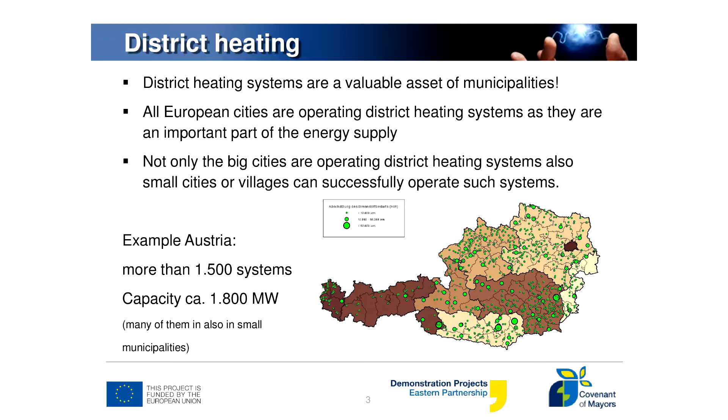I'd like to start with a general approach. I think district heating systems are a very valuable asset of municipalities. But my experience is that municipalities do not really consider this a value, it's more a headache, and usually they want to get rid of it.

They want to either support the disconnection of consumers, because there's less willingness to pay, or there are social issues as well. So it's not seen as an asset or a business case. But all European cities operate district heating systems and see them as a business case, not just a service—they want to earn money. I would propose that you see this district heating system as a business case and try to expand and improve the system, not close it down and disconnect consumers.

Big cities aren't the only ones with district heating systems - small cities and villages can operate them successfully too. Austria is a good example, with a long history in small district heating systems, starting in the 80s with biomass-based systems, because Austria is very rich in forests.

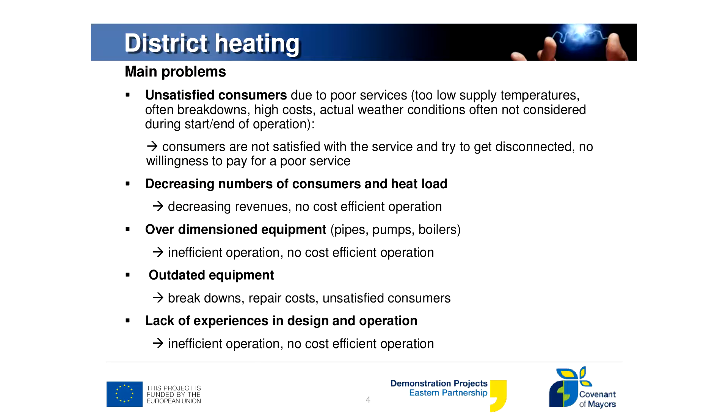What are the main problems usually? Customers are not satisfied because the service is poor - usually low temperatures, high costs, breakdowns, and the start and end of operation is just by the calendar and not the real weather conditions. This creates dissatisfaction for the consumers, and they try to disconnect and build their own individual system.

And this leads to the next problem: we have a decreasing number of consumers and a decreasing heat load, meaning lower revenues for the district heating company, and the operation of the system is not cost effective anymore. This further leads to overdimensioned equipment, huge pipes, pumps and boilers, inefficient operation, and poor cost efficiency. We have outdated equipment.

This leads to breakdowns, high repair costs and unsatisfied consumers. Also a problem is lack of experience in the design and operation of a good modern plant.

So what are the steps in a refurbishment project? I think everybody knows this, but let's go quickly through it. First, you should initiate an energy audit, then do the energy audit, select the refurbishment measures, do the technical design, the authority approval and procurement, implementation, and then monitoring.

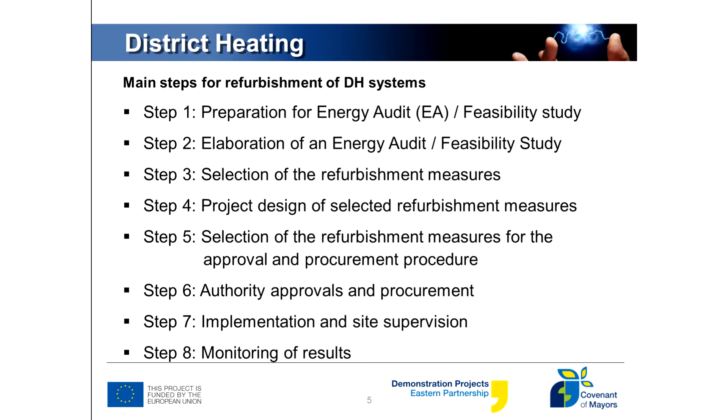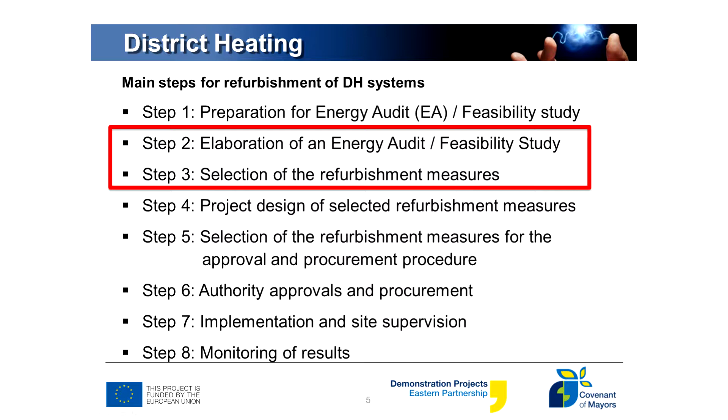I'd like to point out the most important steps in this process - in my experience, the most important steps are during the energy audit and the selection of refurbishment measures. At this very early stage, you actually determine the main components of the project: the boiler size, the type of fuel, the location of a maybe new plant, and this determines all other steps which follow. That's why I think it's very important to think carefully during these steps, how to pre-design and develop this project.

I'd like to pick out some main issues where I think it's important during the development of such a project. You should analyze your consumer situation.

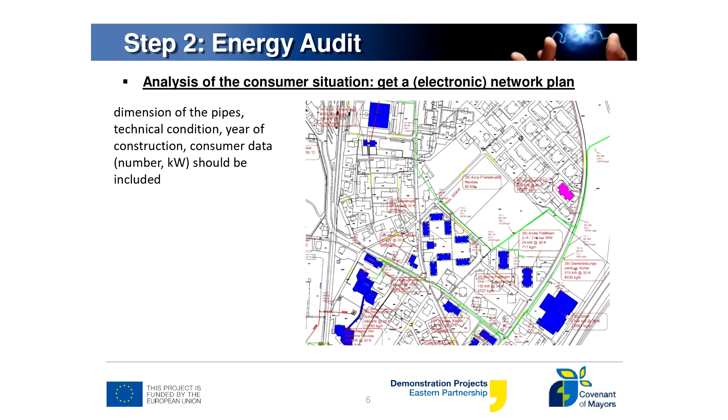You should have available a network plan with information about your consumers - the name or number of the consumers, the heat load, the pipe system, the dimension of the pipe system. Usually, if I come to a district heating system, they are not able to provide a list of consumers or a network plan within 2 hours or even half a day, because nobody knows their system. This is really a bad example, because if you don't know your own system, how can you improve or operate it successfully? So I really recommend good documentation of the existing system.

This, for example, is a table of a consumer list. You have the names of the consumer, the number of the consumer, and a link to the network plan - for example, if there's a heat substation installed or not, the capacity, heat meter, and for the last year, the consumer consumption data.

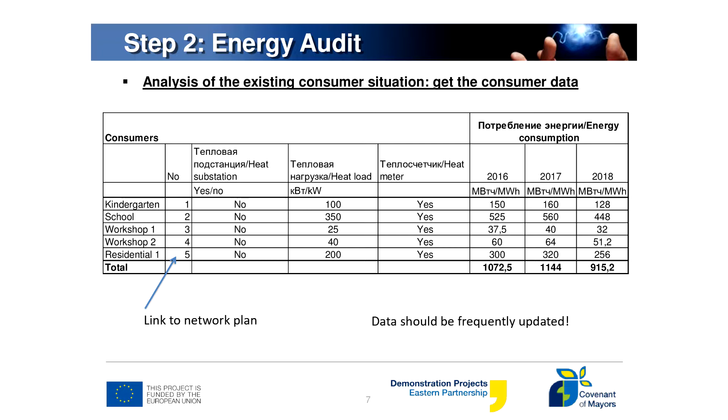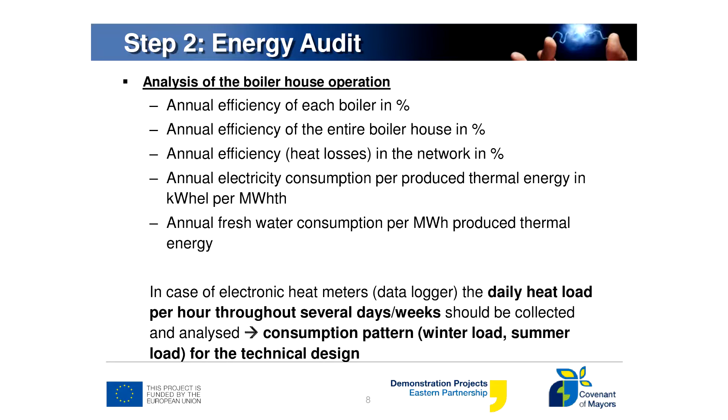What else should you look at? You should analyze the boiler house operation - calculate the efficiency of each boiler, the efficiency of the whole boiler house, the network, the electricity consumption, and the freshwater consumption. It's also important - data in general are important for the technical design, because without data you just guess, and this is not enough for an efficient system.

That's why you also need electronic heat meters with a data logger, and you should look into this data and find out the heat pattern - the consumption for each hour. You should read this data and analyze it, and this will give you the consumption pattern for the winter and also for the summer. This is important for the technical design.

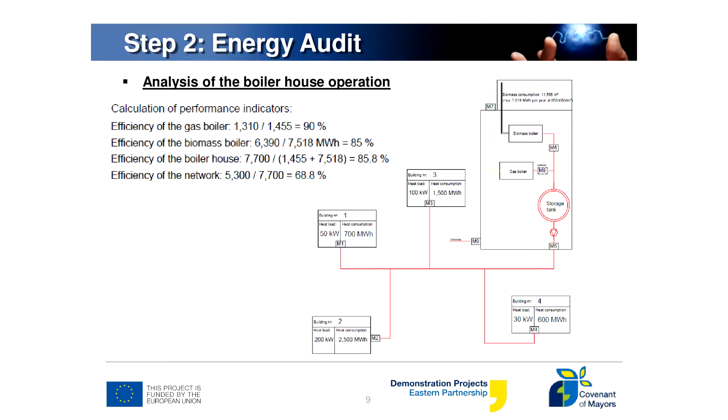This is an example of an example system. You have here the boiler house, a biomass boiler, and a gas boiler. You have 4 heat consumers, and here calculations of this operation data. The gas boiler has an efficiency of 90%, very good. 85% for the biomass boiler. The boiler house in total 85.8%, and the efficiency of the network, meaning the heat losses in the network, 68.8%. So just as an example.

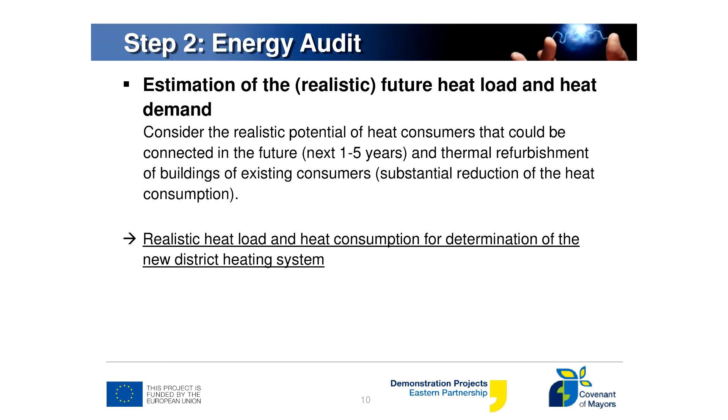Next step in the process, in the development, you should estimate the future heat demand. As I mentioned, the district heating system should be seen as a business case. The operator should try to connect additional consumers and sell additional heat so that revenues will increase, but also the equipment will be used in a very efficient way. You should think of the realistic potential for future consumers, for the next 1 to 5 years, and then you get the heat load for your district heating system.

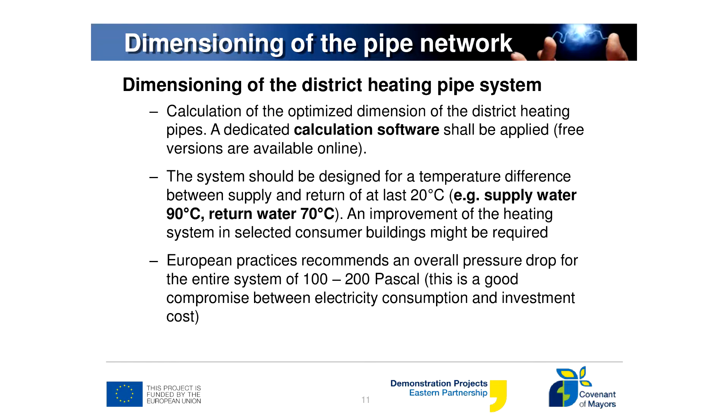What else should be considered? Dimensioning of the district heating pipe system. What we see is very over-dimensioned pipe systems, and this leads, of course, to high investment costs. The technical designer should use calculation software for the dimensioning of the pipe system.

It's also important that there is a big spread between the temperatures of the flow and the return. So it is recommended to have at least a temperature difference of 20 degrees. We have seen cases with 2 or 3 degrees, which is really not efficient. You spend a lot of electricity pumping water around without transferring heat. Usually the parameters are 90 degrees go out of the system, and 70 degrees should come back. This means you also have to think about the consumers, and support them to come to this 20 degrees. So the designer should also look at bigger consumers and try to optimize their situation as well.

This is maybe too technical. Here's an example of a first dimensioning of a pipe system. In this guideline we have prepared a simple table, and with this table you can estimate the pipe diameter for example for a new consumer.

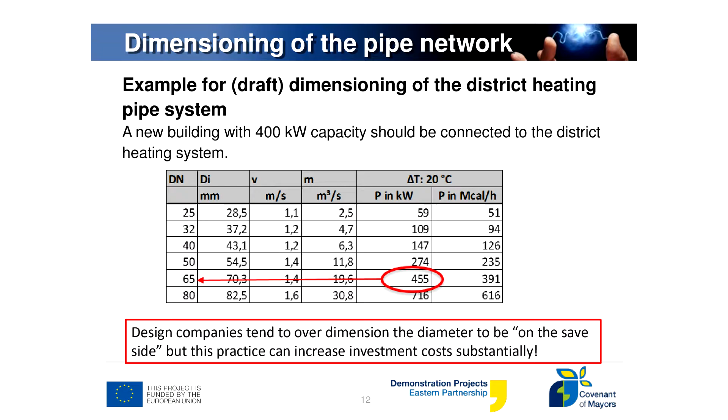In this case, as an example, we have a new consumer of 400 kilowatts. We go into this table, we see, okay, with a pipe diameter of 65 normative diameter, I can transfer 455 kilowatts with a temperature difference of 20 degrees. So this is sufficient to have this type of pipe. But usually design companies tend to over-dimension the pipe diameters because they want to be on the safe side and do not want to risk that there's a problem. So they usually will propose a bigger diameter, but this will lead to additional investment costs and it's not really needed.

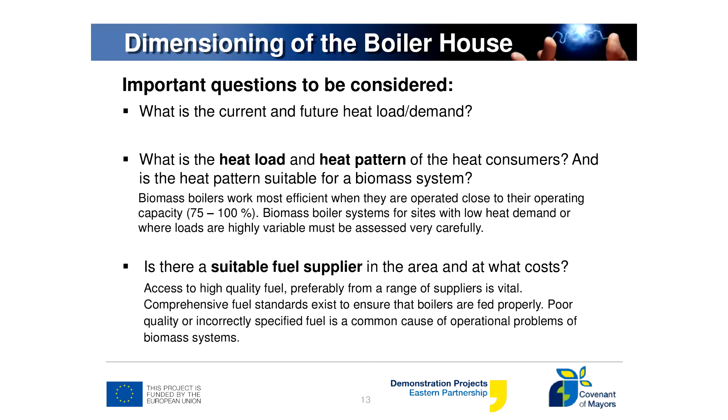What else is important? We are now in the boiler house. You should ask yourself some questions. What is the current and future heat demand? We discussed this already. What is the heat load and the heat pattern of the heat consumers? And when it comes to biomass systems, is this heat pattern suitable for a biomass boiler?

If you have a heat pattern through the days which goes up and down, maybe because of an industrial or business consumer, then it is very difficult for the biomass system to follow this variation, because biomass boilers are a little bit slow following the heat demand, since there's a lot of mass and fuel included. So this needs to be considered.

Next question is where to get the fuel from. You should really at a very early stage think about where a fuel supplier is and how to get the right fuel.

Next question is, do I have enough space for the biomass boiler and the fuel storage? A biomass boiler needs more space than a gas boiler, so you need to check first if it's possible to fit a biomass boiler in your existing boiler house.

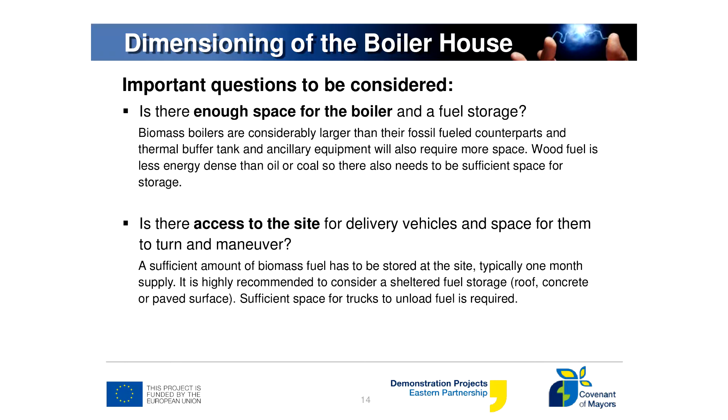Next question is also, you need to bring the fuel to the boiler house, and you need space to store the fuel, but also space for getting the tractor or the truck into this area. The truck needs to turn around. You have to maneuver with a tractor to feed the fuel to the storage. So this needs to be checked as well.

Also, when it comes to biomass boilers, there could be some legal requirements which do not apply for gas boilers, for example emission values. And of course, you should, at a very early stage, also think of a realistic investment cost and operational costs.

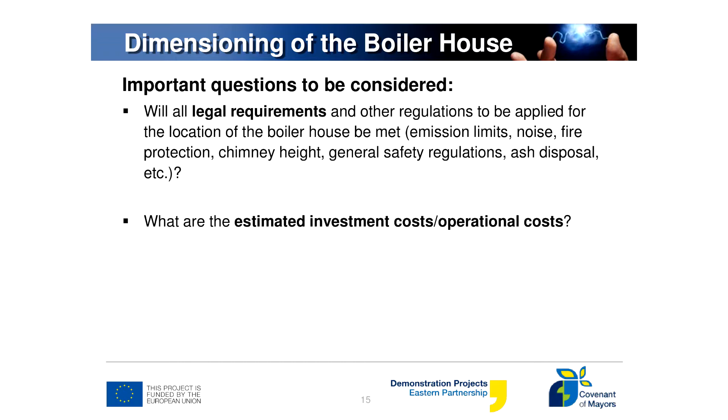I would like to show you now a table and explain the difference between a natural gas boiler and a biomass system. There are some significant differences, and each system has some advantages and disadvantages, and the best is to combine the advantages of both systems.

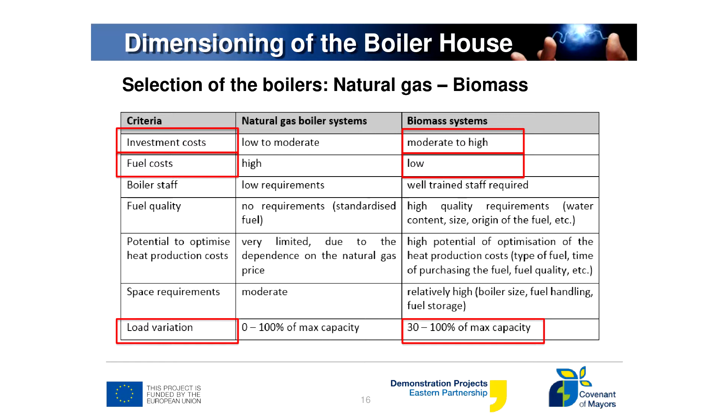So, investment costs: natural gas boilers are usually quite low, while biomass boilers require high investments. Fuel costs: natural gas is high, fuel costs of biomass are low. When it comes to the boiler staff, natural gas boilers do not need really qualified staff, but biomass systems need trained staff and some training. Fuel quality: gas is actually a standardized fuel, but for biomass, fuel quality is a big issue, and you need to take care of this.

Potential to optimize the heat production costs: if you have a gas boiler system, you cannot have an influence on the gas price, you just have to take it and stick to this price, so you have very little room for optimization. But for a biomass system, you have a lot of room to improve and make the system more efficient and more cost efficient. So this is really a big advantage.

Just think, if you have a big fuel storage, usually the fuel price during summertime is cheap, but during wintertime it's high. So if you have a good storage, you buy cheap fuel during summertime, store it, and have it throughout the year. This is completely different with natural gas, where you depend on the international gas market and need to buy it at the international price.

What else is important? The space requirements. For biomass boilers, you need a little bit more space in the boiler house, and also for the fuel handling and fuel storage.

Also a difference is in the operational mode of the boilers. Gas boilers you can switch off and on, and they have actually a 0 to 100% range. Biomass boilers have a limited range, you cannot decrease the heat load to 0. Usually you operate between 30 and 100%, but the highest efficiency is between 70 and 100%. This is also the reason why you use biomass systems usually for covering the base load with 80, 90, 100% of the load always, and for peak loads, the natural gas boiler system.

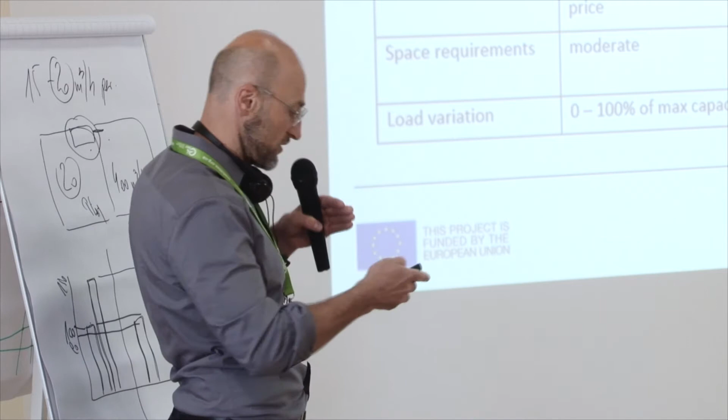Let me show you the most important differences: investment costs, biomass boilers are higher than gas boilers; fuel costs are low for biomass boilers; and the load variation is not so flexible for biomass boilers. So both systems, natural gas and biomass, have some advantages, and the best is to combine these advantages. Usually you use a combined system, with the biomass boiler as base load and the gas boiler for peak loads.

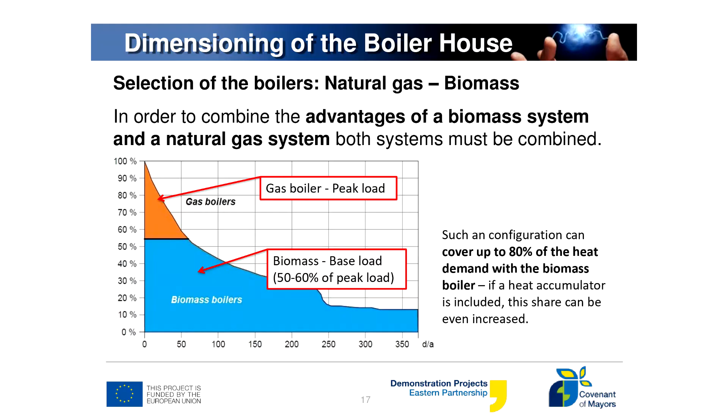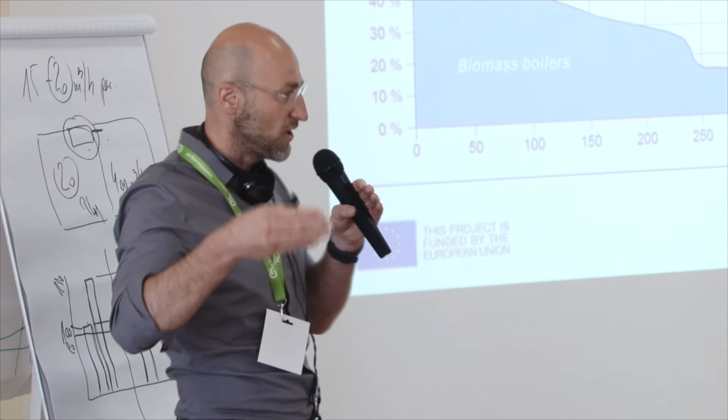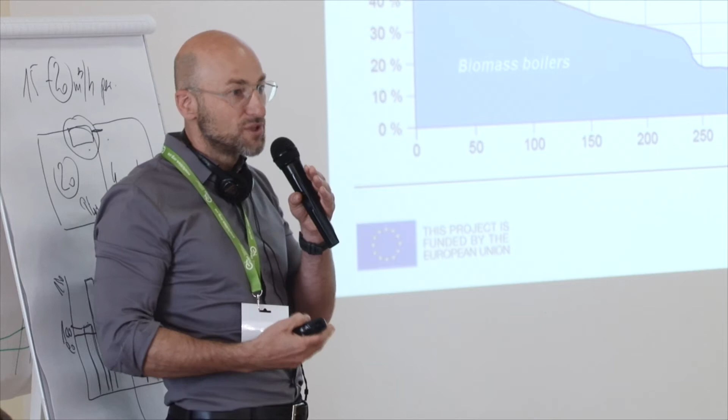If you measure each hour the consumption of your system, you get a value for each hour. For one year, that's 8,760 hours, and if you arrange these values according to their value, you get such a curve. This shows the summer operation, then it rises to the high peak during some days in winter. The highest load, 100%, let's say 1,000 kilowatts, will appear only 1 or 2 days during the year, when you might have minus 25 degrees, only 3 or 4 days a year. To cover this peak, it doesn't make sense to dimension the boiler for this very high peak, because that's too cost intensive.

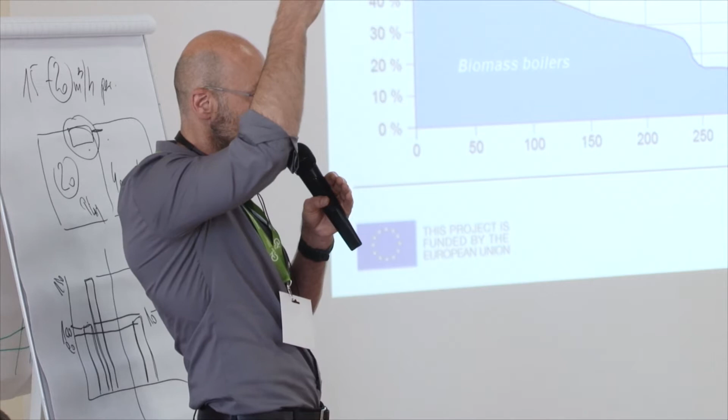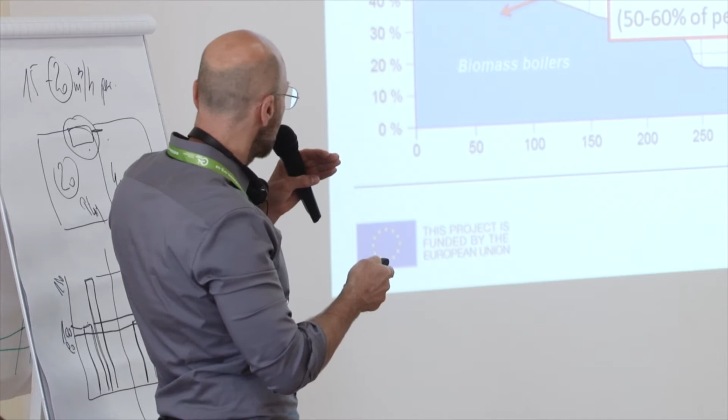That's why you dimension and use the biomass boiler for the base load, let's say 50 to 60%, and the rest is covered by the gas boiler, because you can easily switch it on and off. With such a system, you can cover up to 80% of the heat demand with the biomass boiler, so the natural gas consumption is quite limited.

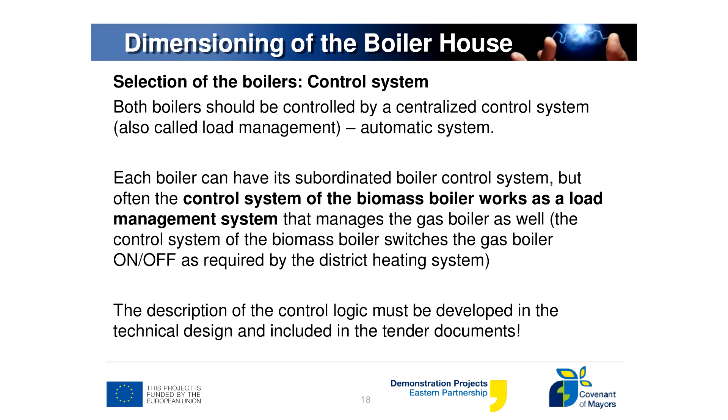Another important issue is the control system, because our experience is that the control system is a little bit neglected, also by the technical design companies. But it is important because you need to combine the biomass boiler and the gas boiler, and it's recommended to have an automatic system. Usually the biomass boiler has a more advanced control system, because it has to control a lot of fans and drives. Usually the control system of the biomass boiler is the leading control system, and this system switches the gas boiler on and off.

What is in any case required is a description of the control logic, and this must be included in the technical design and in the tender documents. This is very important, and I've very rarely seen such a description. If you ask somebody in the district heating company how the system works, nobody knows.

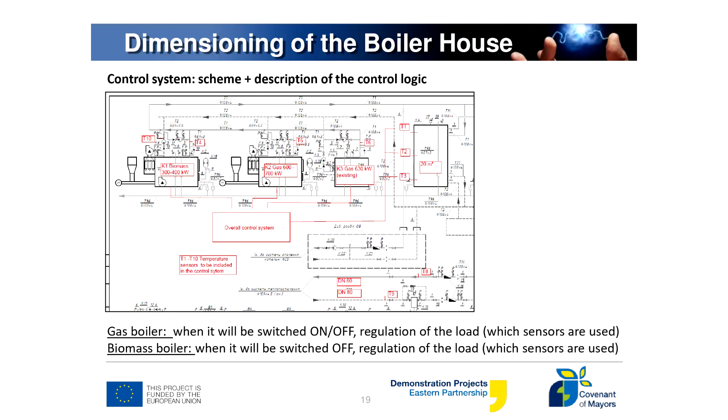What is needed as a minimum is a scheme. You see here three boilers: a biomass boiler, a new gas boiler, and an existing gas boiler, and also a heat accumulator. What's needed is all the temperature sensors, added here in red, and the overall control system, which has to manage all three boilers, switch them on, switch them off, and control the load according to the demand of the system. With three boilers, it's already quite an important and difficult control logic.

The technical design company should think of it and write it down, so this scheme is needed, but also a description at minimum of when the gas boilers will be switched on and off, and also when the biomass boiler will be switched off. Please make sure the technical design company delivers this, and it should be included in the tender documents as well.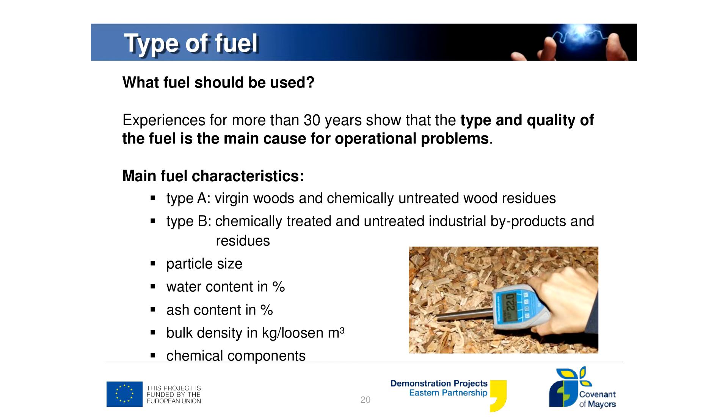Next issue is the fuel. This is also very important for biomass systems. As I mentioned, in Austria we have more than 30 years of experience operating such systems, and the number one problem is the quality of fuel. If a problem happens in the boiler plant, it's mainly because of the fuel.

You should really take care of this issue. There are international standards describing fuel quality, and usually the main characteristics include the type of wood, where it comes from. We distinguish two main sources: virgin wood, directly from the forests, chemically untreated, and chemically treated wood or industrial byproducts and residues. This chemically treated or waste wood is really tricky and not recommended for standard boilers. You can use it maybe in a bigger power plant, but in smaller power plants we recommend using just virgin wood from the forests.

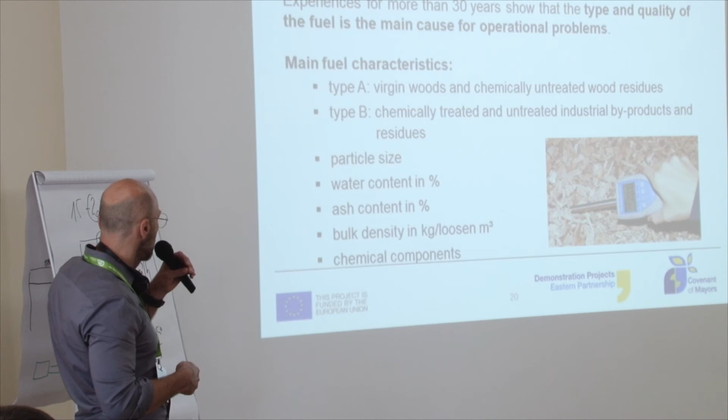Also important is the particle size, water content, ash content, bulk density, and the chemicals included in the fuel.

Some criteria: the fuel should be available in the region, of course. You do not want to ship fuel from, say, Canada - it should be local. You should use international standards; there's a good ISO standard, 17225. The type of fuel and the fuel characteristics must be included in the tender documents.

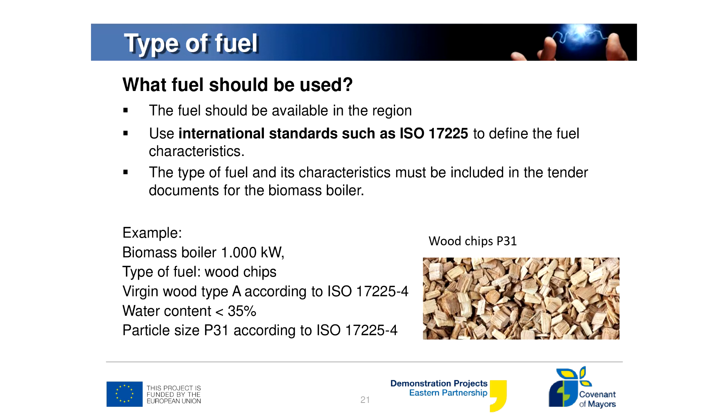This is very important, and here is an example. You want to purchase a biomass boiler, 1000 kilowatts. Type of fuel: wood chips, virgin wood type A according to the ISO standard. Water content less than 35%, and particle size according to the international standard is so-called P31. Just to give you an impression, this is such a type of wood chips - minimum about 16 millimeters, average up to 31 millimeters.

I would like to show you some examples of problematic fuel. Fuel with high water content, more than 50%, is really problematic and should be avoided because the capacity of your boiler plant decreases dramatically. Only in big boiler plants should such wet fuel be handled.

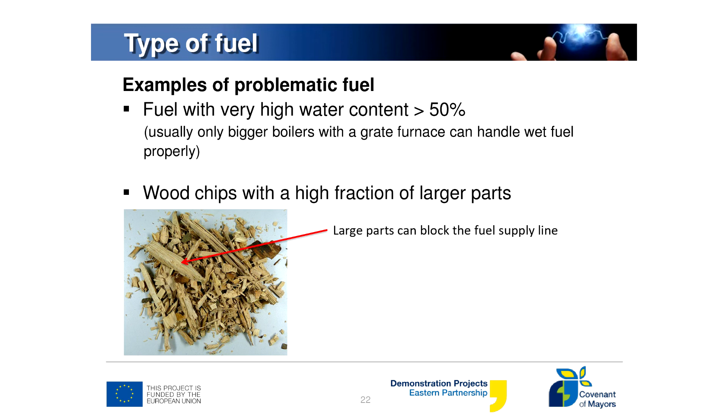Another problematic fuel is wood chips with larger parts. You see here a mix of large and small parts, and usually your fuel supply system gets problems with these larger parts - they can block the supply line and stop the boiler.

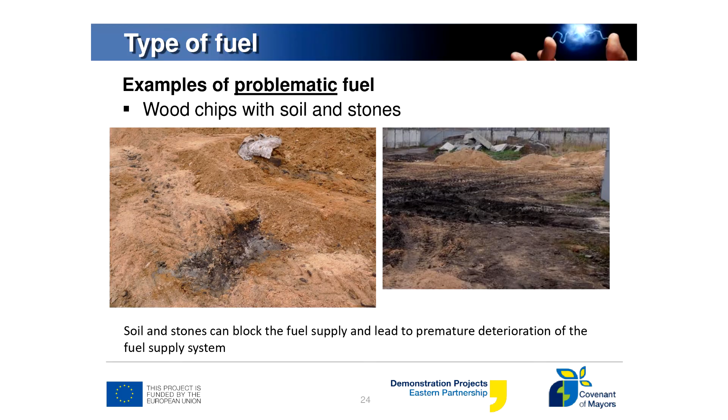You see here a picture of fuel stored on just an unpaved area. You see mostly mud, and soil and stones get mixed into the fuel - this should be avoided. So I think I'm at the end of the presentation.